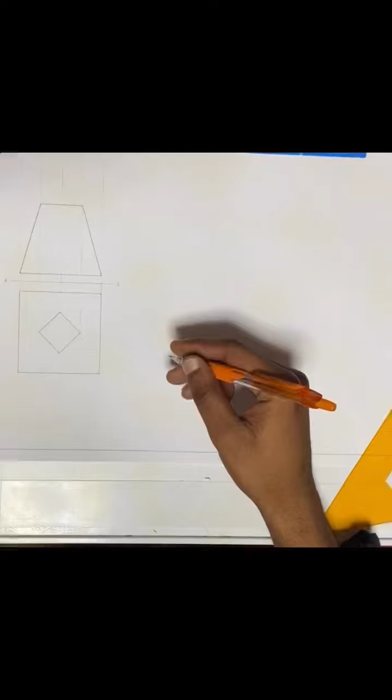Okay, guys. So now we are going to do a transition piece, a square to square transition piece. Here we have our front view and we have our top view. As you can see for yourself, both of these views are incomplete. And this is a first angle orthographic projection. So what you ought to do first is complete both of them. Let me start with the top view.

Then the last one we have here is our seam. Next, we must complete this one. As you can see for yourself here, it forms a triangle. So here there has to be a triangle as well. So now we're all done with the lines, the seams and everything. Now what we must do is number the lines, the seams as well.

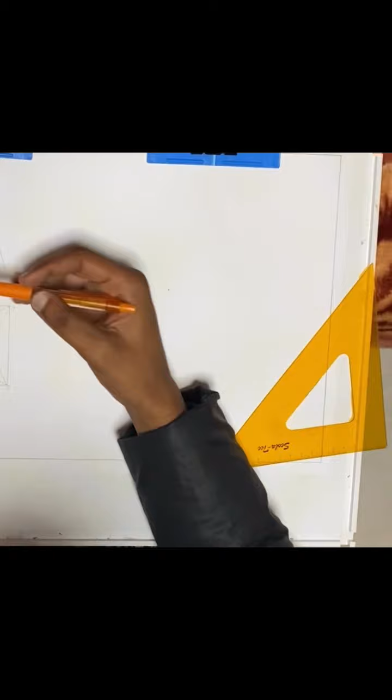So, as all of them are the same length in a way, we can just call them B, respectively. But again, we are going to get their true length because they are not parallel to the XY line. To determine the true length of B, we just need one of the base sides. As we have one of the base sides here, we are going to use the cone method. We're going to measure here. Then we're just going to scribe an arc.

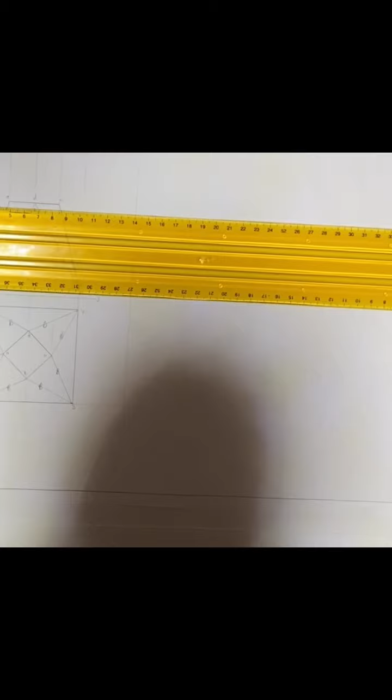After scribing an arc, we join this arc with the base here. After joining that, we project it going up. After projecting it going up, we then join it here. So now here, A, B, C, D, you see, all of these edges are parallel to this because it's right on the top in a way, if I may put it that way. So these we can just name C, C, C, C.

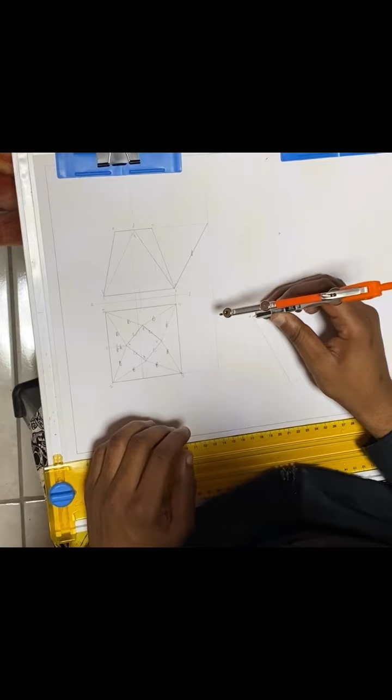Yes. So now that we have determined our true length and double checked whether they are okay or wrong, we can start with our development of the transition piece. We're going to start from A, you see. We can draw a line at any angle, then we know that A is parallel to the XY line. So we're just going to have this because it's the true length. Then we're going to name this 1. After naming this 1, we also know that this is the true length.

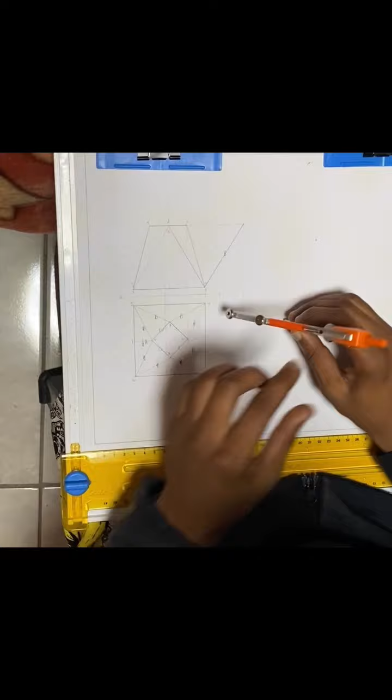So to determine, how should I put it? To determine 2B, no, 2A rather, we are going to use this edge here. This is the true length of B. Then here we have 2. Then we join the lines. Remember, here it's a folding line. Then here it's an outline.

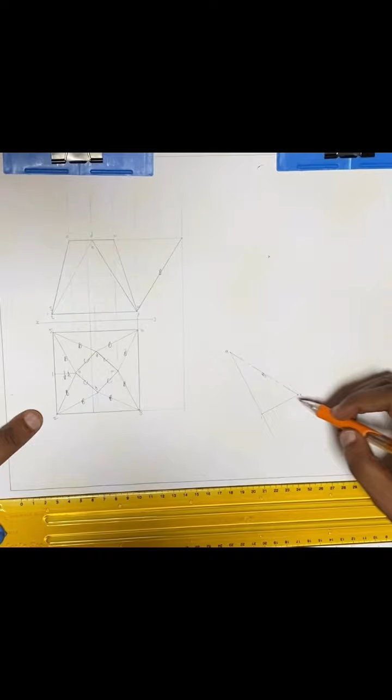So as we have this now, we are also going to determine, okay, we have B here. As we have B here, it's 2A, then right in the middle it's B. So now AB here is the true length on the top view as well as on the front view. So we can measure this here.

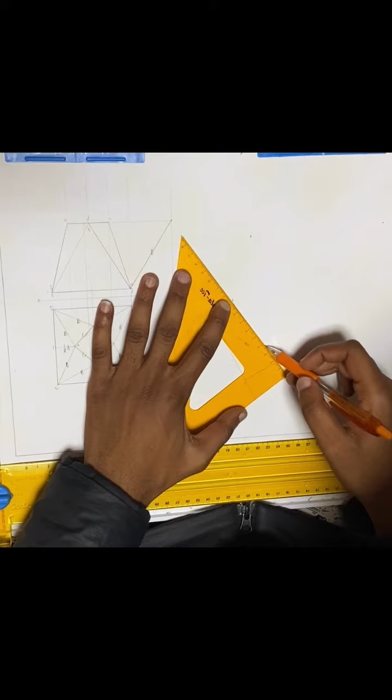Then scribe an arc here. So then use the true length of B. We could have used this one as well. There. Then here now we have point B, small letter B. Then we join using folding lines. Then here we use outlines.

Remember, you have to start from the base, and the base is from here using 1. Now we're using 3, you see. So then there's 2 there. Because it's our true length, we're just going to scribe an arc. Then here we're going to use the true length of B. Then we scribe an arc. Then now we have 3.

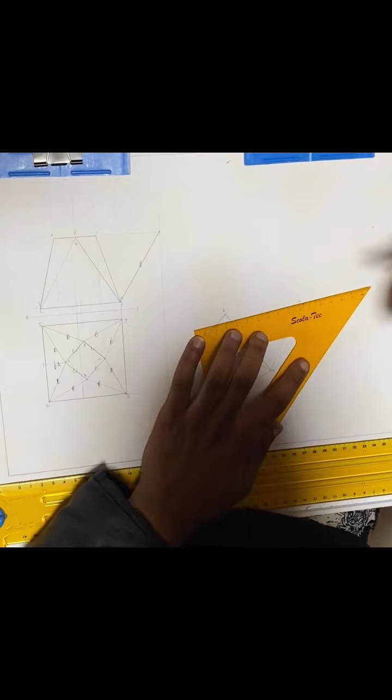So then as you can see for yourself, as much as we have what we just determined now, the others would be so effortless to construct. Here we have a folding line. Then here we start from B. Then scribe an arc. After scribing an arc, we get our true length.

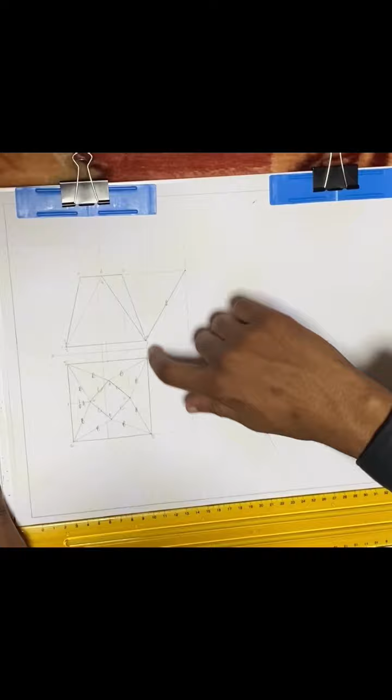Scribe the arc there. Then now we have point C. We join the lines, outline. It should be nice and dark. Then we have our folding line. There. We continue with the process; here we have our true length. Scribe an arc. Then we use our true length here that we have for B.

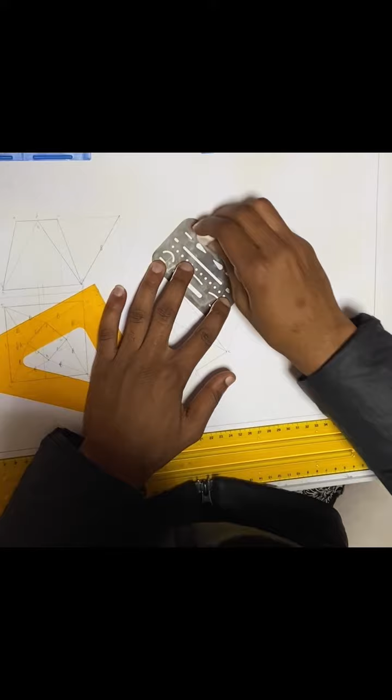Then here we have 4. Outlines. Folding lines. There, folding line. So then we move from C to D, being it as a true length. Scribe an arc. Then we use our true length for B. Scribe an arc. Then we have D now.

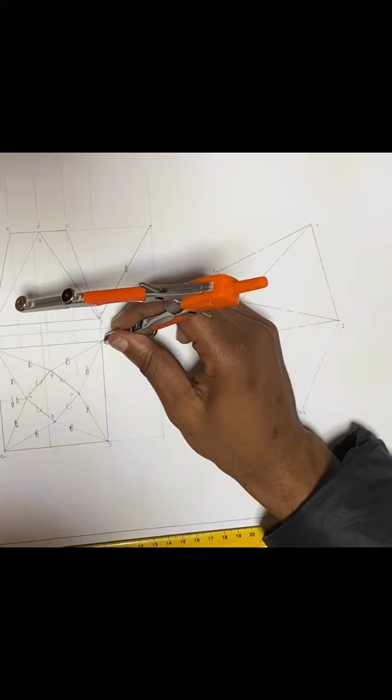Outline. Folding line. We continue with the same procedure from 5 to 4, being it as our true length, B being our true length, then now we have 5. Outline, folding line.

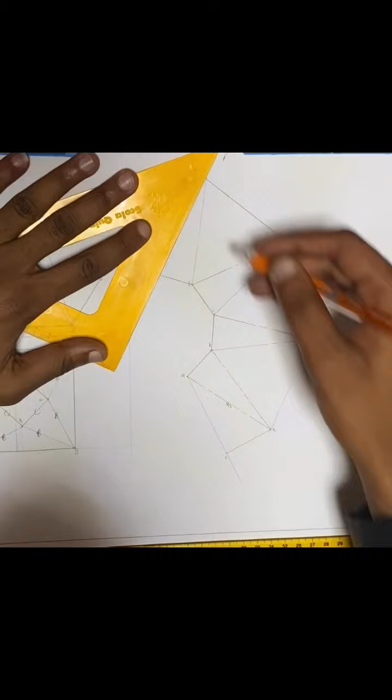Then from D to A, back again. Being it as our true length, scribe an arc. Our true length. We have A now. Outline, folding line. And remember now, we started off from A1, and here we have A5. So then these must meet at A1, which means you must also have another construction.

Okay, having our true length from 5 to 1, then having our true length from A to 5, then we scribe an arc here. Then we are almost done. Then we join the lines here. Here we can just use an outline, and here an outline, because they all meet here.

As far as you can all see for yourself, we are done. You must just notice that you must have outlines that are dark. Folding lines, you must always specify, showing that this is a folding line, this is an outline, using the types of lines. So I think we're okay now.

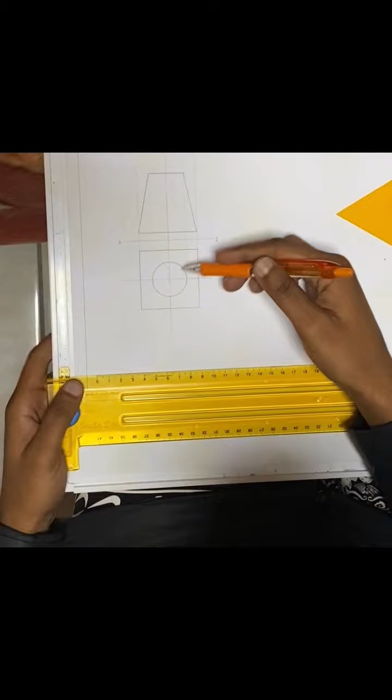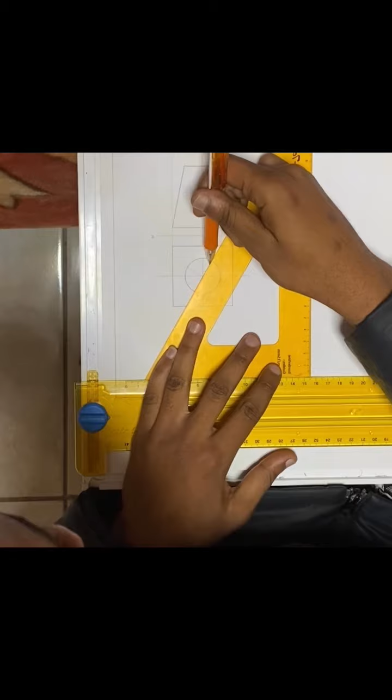Okay, now we're going to work with square to round. As we're working from square to round, we are working with the circle. The circle, first things first, you must always divide it into 12 equal parts. For that, we're going to use the 60 by 30 set square. So as we have this now, we can just do our seams. You see, the seams all join to the base, from the circle to the base, respectively on the 12 divided lines of the circle.

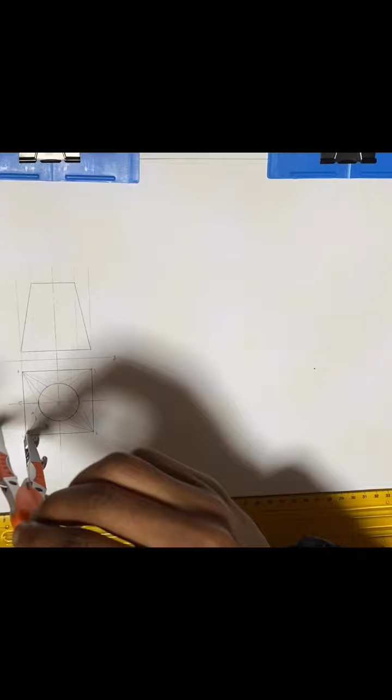What we can do, we can just start with D. D, which passes through A respectively, and C, which passes through B respectively. Then we can just join those arcs. Then after that, we're going to project it going up.

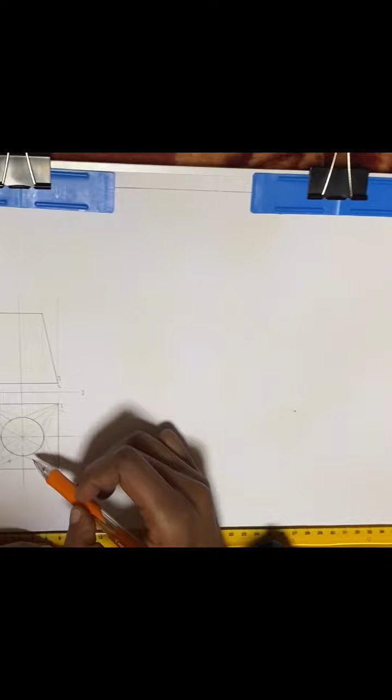Then we project this one again, because we're working with the other part. Okay, let me just finish up numbering. Here we have 5, then 4 at the back, 1 at the front, then we have 2 here, 3 at the back. Then here we have A, B, C, D, E, F, G, H, I, J, K. That I won't mention, but we'll stick to what we have already, because this is circular, it's a round.

Okay, then now what we're just going to do here, we're just going to join this one and this one for us determining the true length. Okay, for the first one, you can see that first C passes through B, then it goes up, which means here we have B. I can just use B / C, you see. Then here we have D and A. So then this one is the true length of

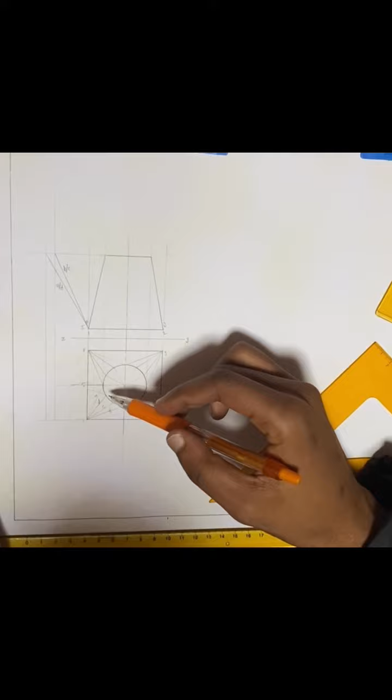A / D. So then as much as you guys can see, I'm only having two true lengths. Led by that, this is a circular transition, meaning that, as you can see, the arc here passes through from D to A, then from B to C. That is why I have only 2 arcs for determining the true length.

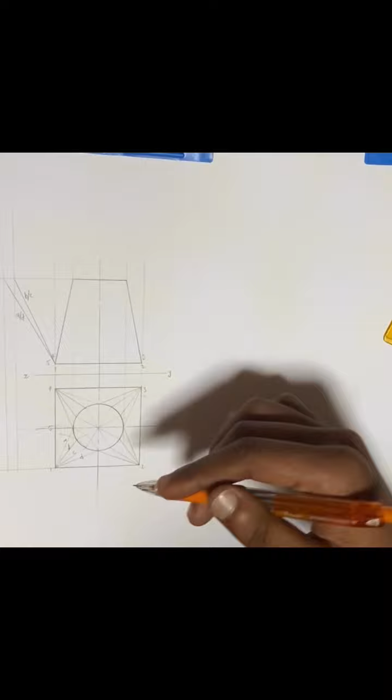Okay, so then now from 5, I'm having 5 here. 5 is the seam, you see. Let me just label it as an alphabet. Maybe I can use E. So then the seam of 5, E, is parallel to the XY line, meaning that this is E, and it is the true length as well. So then as we work from here, we can use the Thales theorem for determining the circumference of the circle. When determining the circumference of the circle, I can just use just a random line.

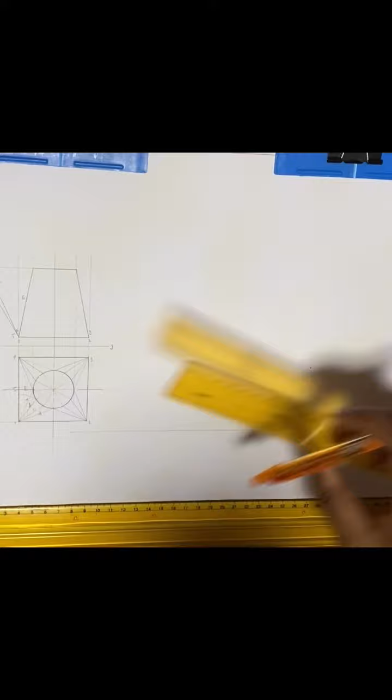Okay, so then from the instructions, they gave us only the radius of the circle. The radius of the circle was 15. So then to work out the circumference, the formula is pi multiplied by diameter. Pi is 3,14 multiplied by the diameter. As we're having a radius, the radius is going to be times 2. Then the diameter is 30, which gives us all in all 94 millimeters.

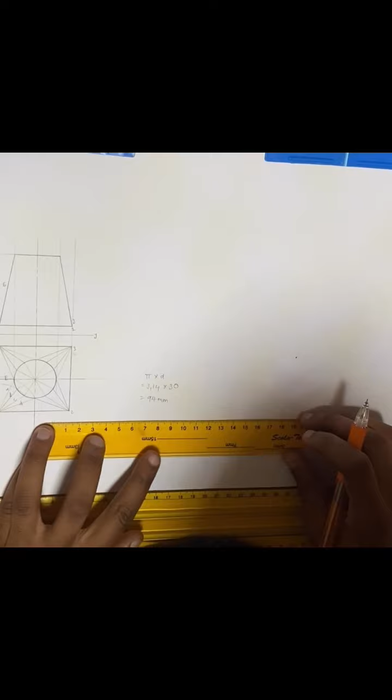So then there I drew a straight line. I'm going to just measure it using my straight edge here. There is 94 right there. So then I'm just going to draw another line for us to divide the line into 12 equal parts. There we have it. Let me make it a bit longer. Then here, this is going to be 1. Then we're just going to divide the line into 12 equal parts. You can just set your compass to any length, then just scribe arcs using the same length. This is called the Thales theorem.

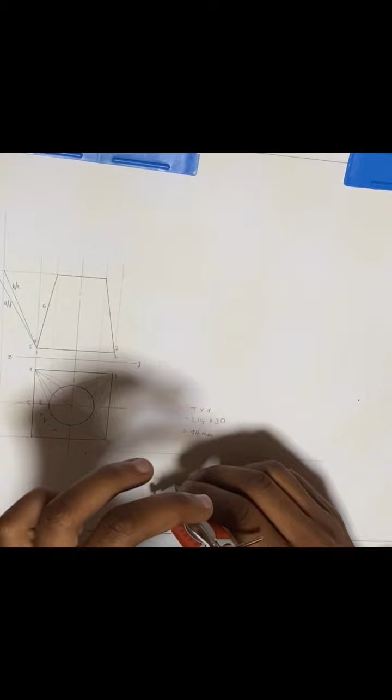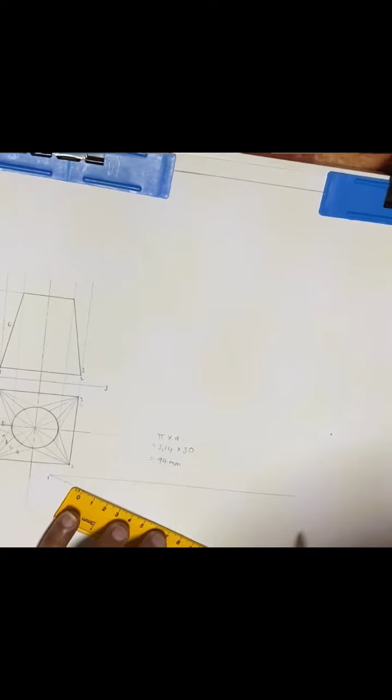Here you must work with precision for you to get the exact length. Let's see. Just want to fix this. I've made a mistake. There. One, 2, 3, 4, 5, 6, 7, 8, 9, 10, 11. Oh my goodness. There we have it.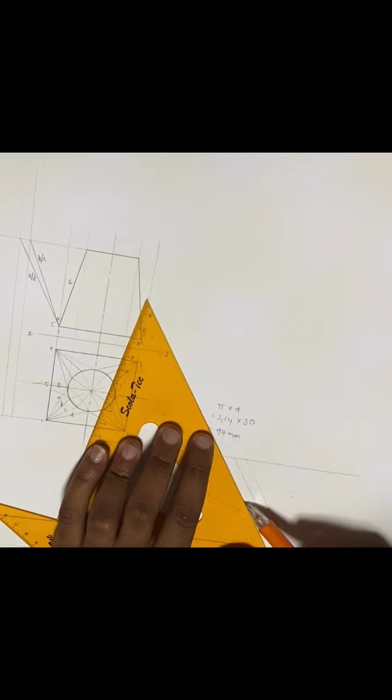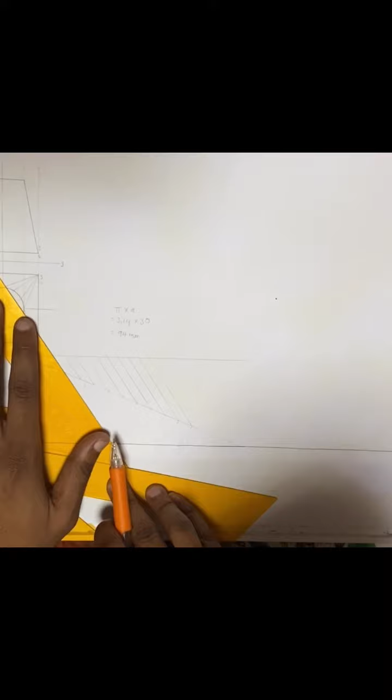Then we're just going to join the lines. You hold the bottom base steady, then you slide this. I'm doing this because I want to know the distance between the fold lines. There we have it.

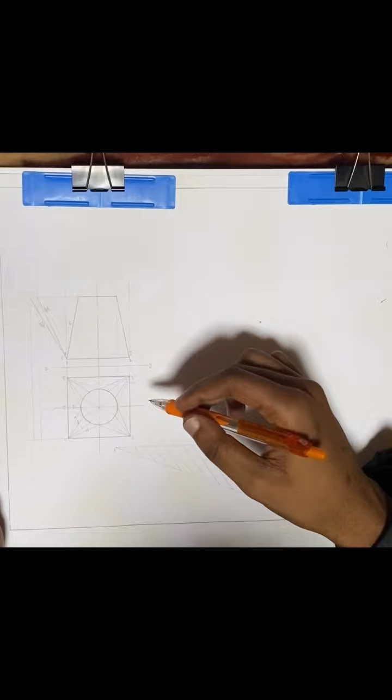The construction here, as we've divided by 12, is just a division showing the actual true length between the segments here, A, B, C, D, going right round. So then now we can start with our development. We're going to start from the seam, which is 5E. I can just start at any point. Okay, this is going to be 5E, going down like that. As I have this now, 5E, I know that the true length of 5E is right on the front view.

I can just take the distance using my compass. Put my needle point there. Scribe an arc. So then as we have here now, this is point 5, this is E. Yeah, this is 5, this is E. So then as we have that part now, we are working from E going to the adjacent side being A. So then the true length for A, we have it right there.

Then we all know that this is the actual true length from 5 to 1. It's a true length on both sides. My arc was very much short. Let me just fix that. There. So then this is going to be 1. We join the lines. Outline. Fold line.

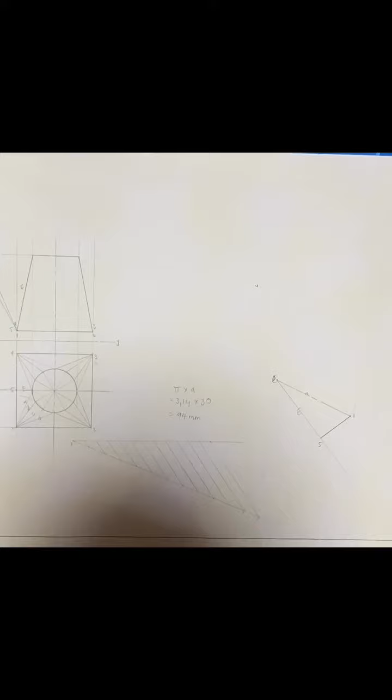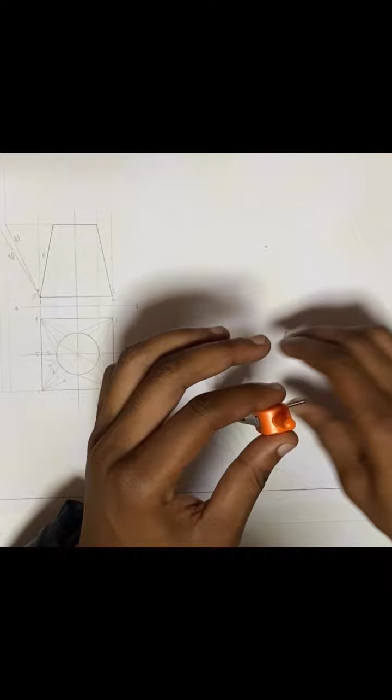So then as we come back here to this part again, here we are working from A. This is A. This is E, capital letter E. This is the seam. This is A. So then now we must work from A to B. Okay, from A to B, you must first work out the true length. Then here we have the actual true length from E to A. Just going to scribe an arc there.

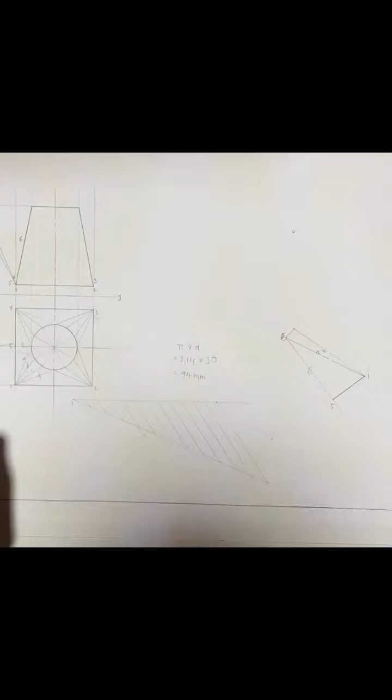Fold line. Then here you can just draw it in construction because you will see later on. Okay, we're working from A. This is B. So then now we're working from B to C. Excuse me. Here's the true length.

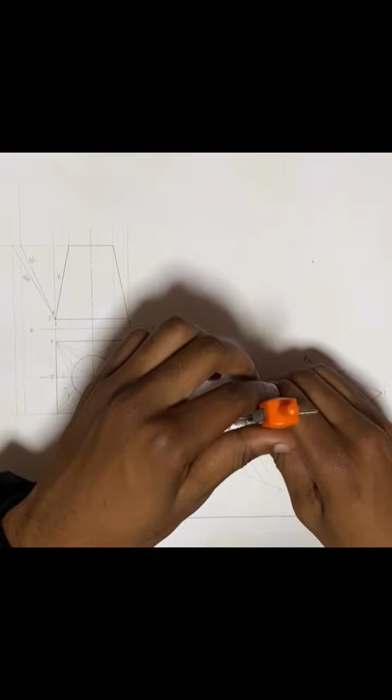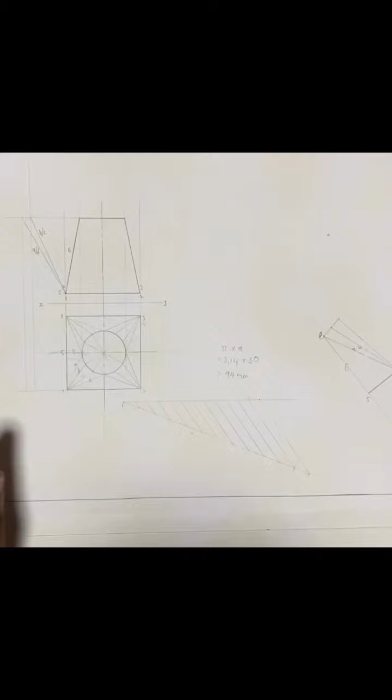We work from the base. We come here. Draw another arc. Then we join. Construction. Folding line. We go on with the same procedure.

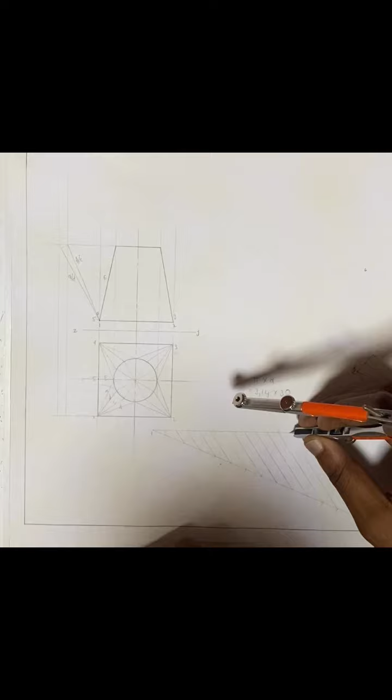This was A, B. Now this was C. Now we work out D. D. Having our true length there. We work from the base. We work from the true length that we have here, which was our circumference of the circle. We come here, swing an arc.

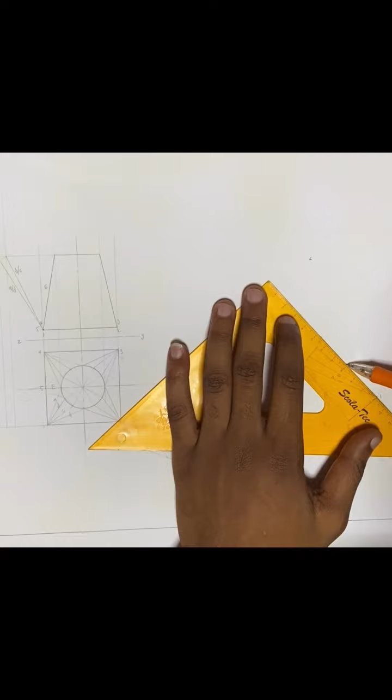Construction. Folding line. So then now we have worked out the first folding lines that we have from the circle itself. Now we ought to work out from 1 to 2. Okay, from 1 to 2, it's our true length. Just going to swing an arc.

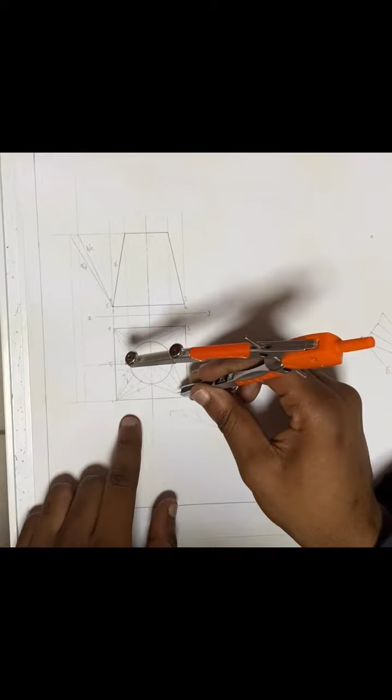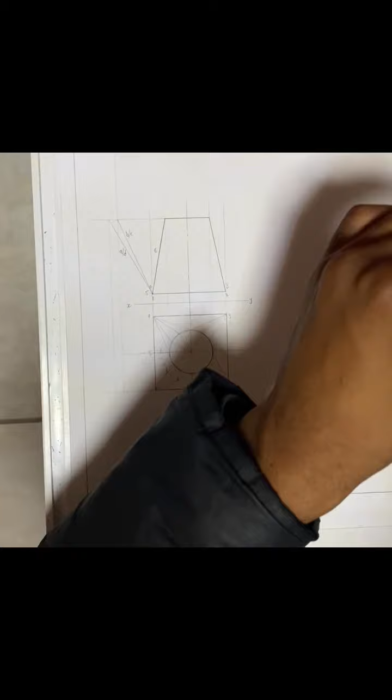Okay, from 1 to 2, we start all over again. We start with what? A. Because you can see for yourself that it is seemingly one and the same thing. So then we're going to use the true length of A. You join the lines. This is 2. Outline. Folding line. We repeat the same procedure.

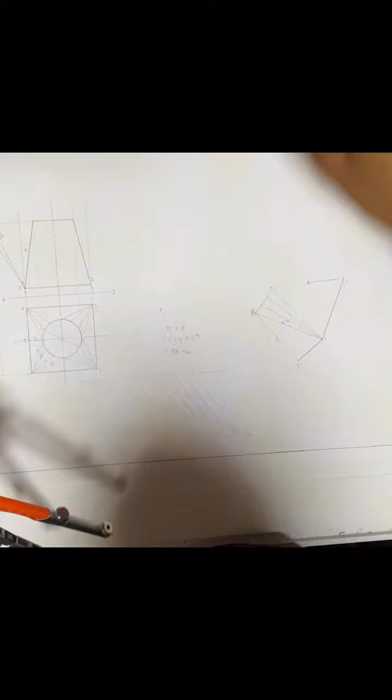Now working from A to B. Let's first label this A to B. We determine the true length of B. We work from here, square an arc. Then here we also have our true length here. Grab another arc. Construction. Folding line.

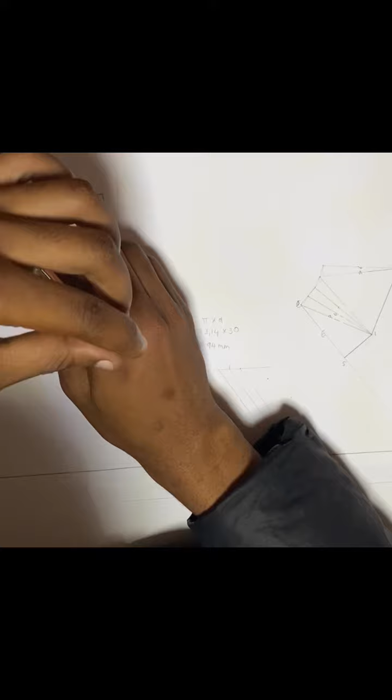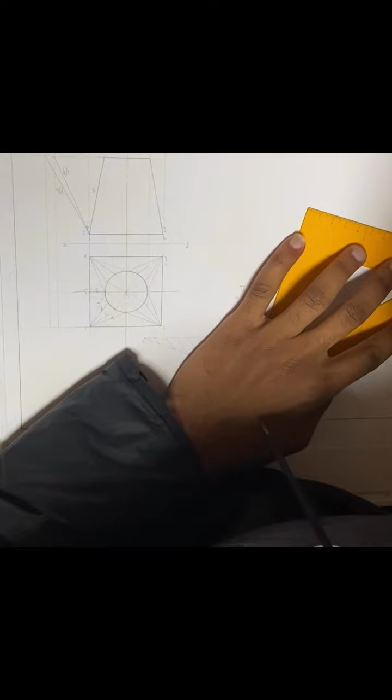We have B now. Then we work again from B to C. Square an arc. Square an arc. Come back here again. Square an arc. Construction line first, then a folding line. Then now we have C now.

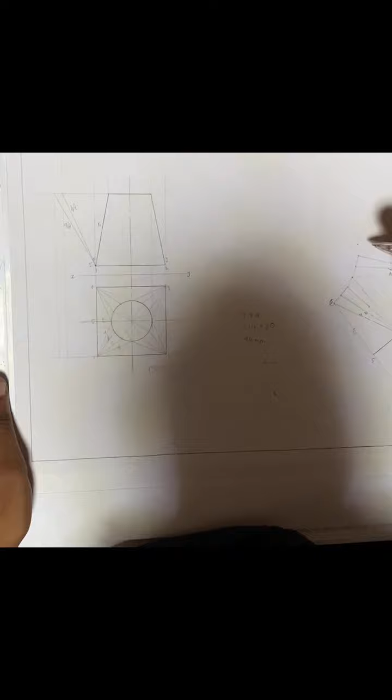Then we come back again. We use the true length of D. Square an arc. Then we use the true length from the Thales theorem. Just grab an arc. Then you join the lines. First things first, construction. Folding line. There we have it, D there.

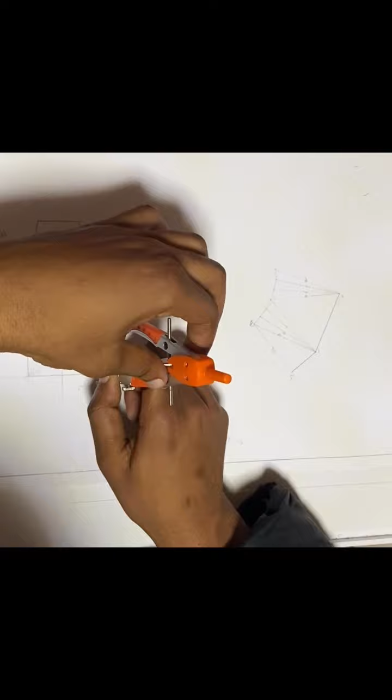Then work again from 2 to 3. From 2 to 3. We're almost done. Just grab an arc. Then from 2 to 3, we start all over again using our true length for A. Just grab an arc. Having here an outline. It's supposed to be dark. A fold line.

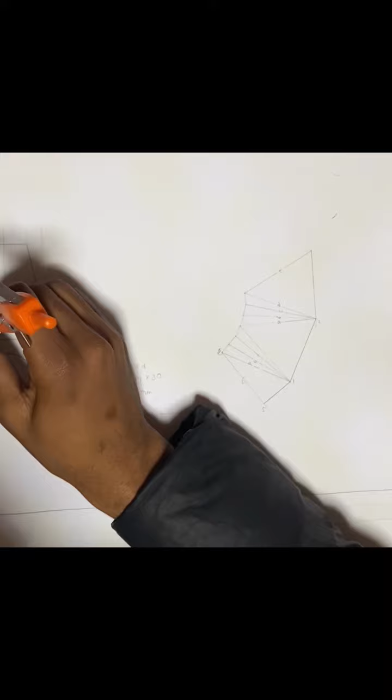A again. Then work from A to B. Use the true length that we already have. Just grab an arc. Use the true length that we have from the Thales theorem. You can use any of these. Use the construction. Then here a folding line.

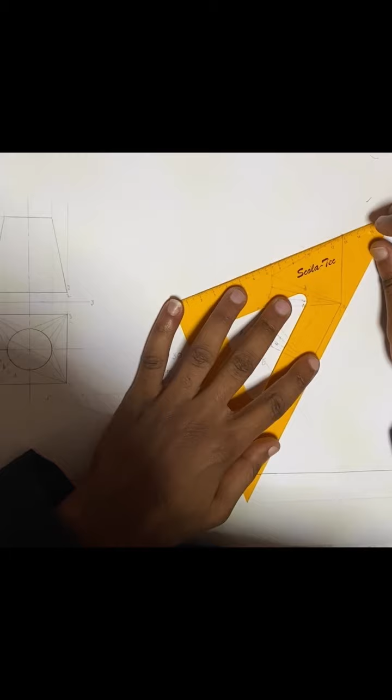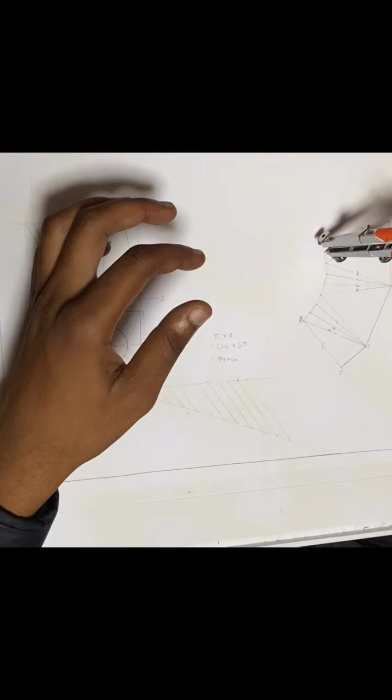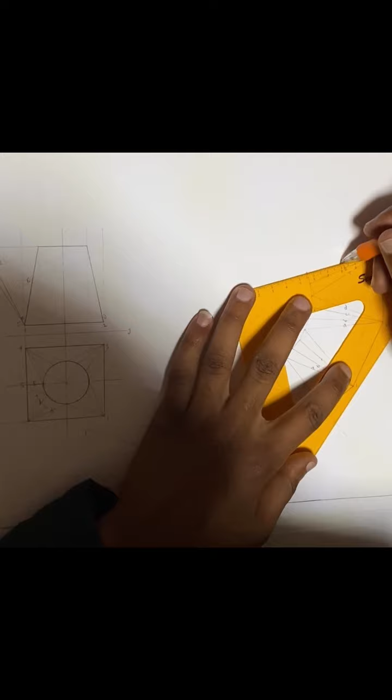Then we work out again another true length that we have for C. We use the true length that we have from the Thales theorem. Construction line. Then here a folding line. There we have it, C. From C, then we have D.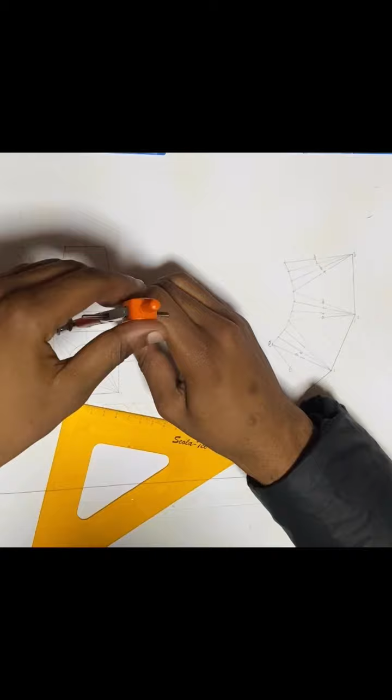Let's grab another arc. Construction. Fold line. Then we have, here we're having 3. So then now we're working from 3 to 4. 3 to 4 is the true length. Then first things first, we're starting off with A, having our true length.

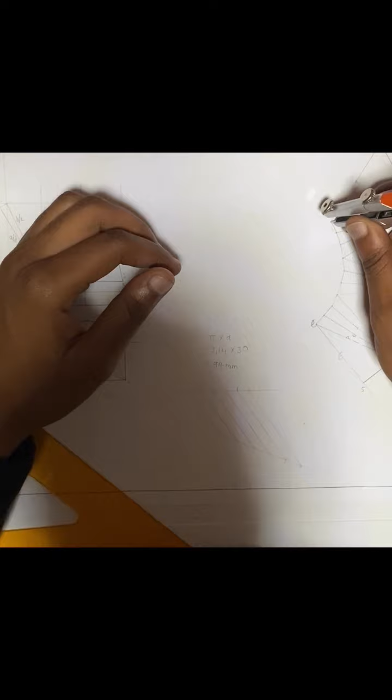Outline. Excuse me. Folding line. This being A. So then as we're having this as A now, you go to B. Scribing arc. Folding line. Then we have B now.

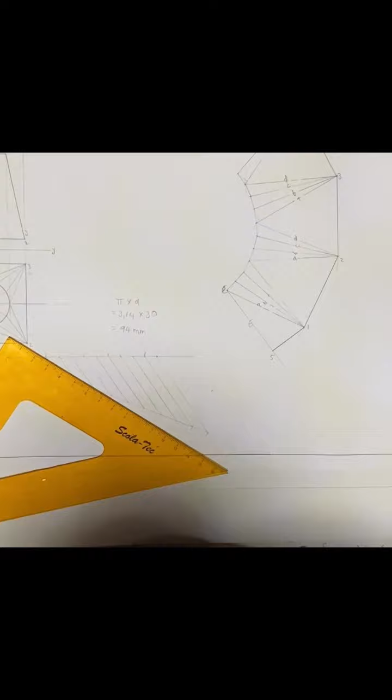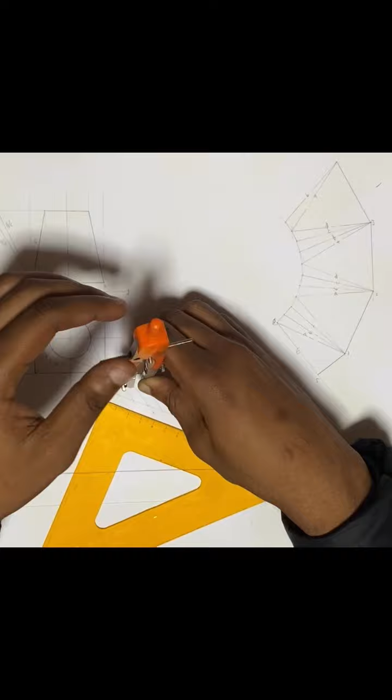From B, it's C. Determine the true length. Scribing arc. We work from this. Having it the true length. Scribing arc. Construction. Folding line, C.

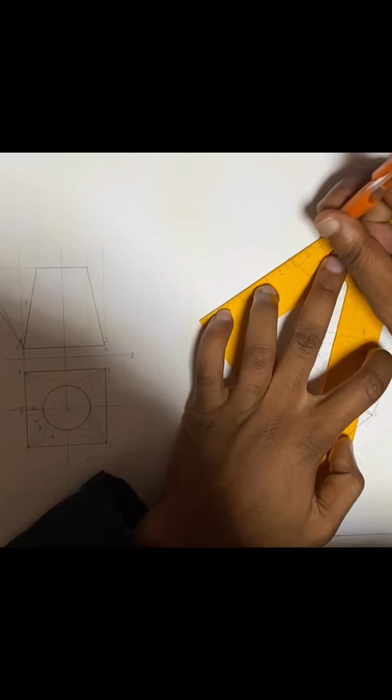Starting from C, we have another true length. Scribing arc. Work from this to get the true length. Scribing arc. There's D. Then here it's 4. So then remember now we're working from E to 5. And E to 5 is the seam. So then now we must also have another construction from 4 to 5.

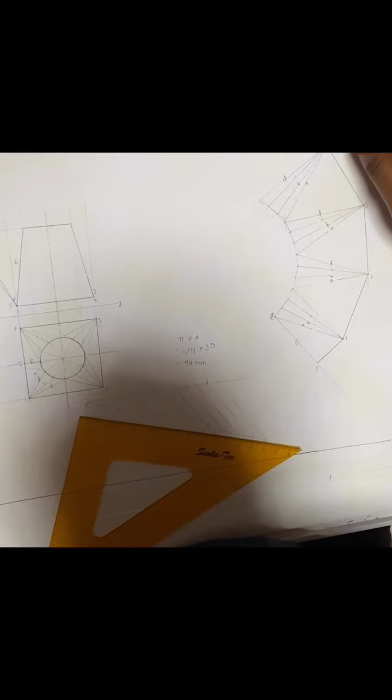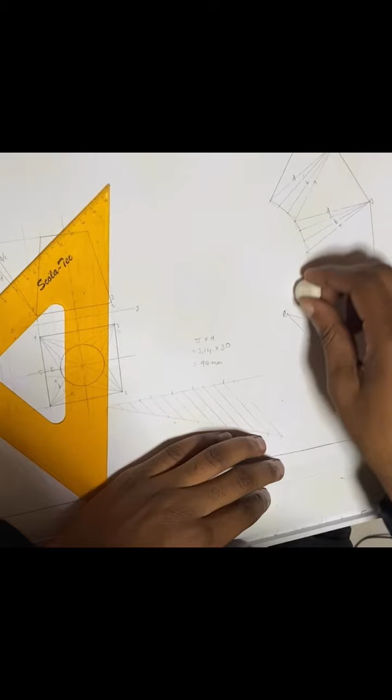So then what we have here, we have the true length from 4 to 5. There we have it right there. We already have the true length for the seam. Then we label this point 5. Join the lines. Outline. This is an outline even, because it's connecting to the seam. So then now, here we are only just having construction line. We just need to erase this off.

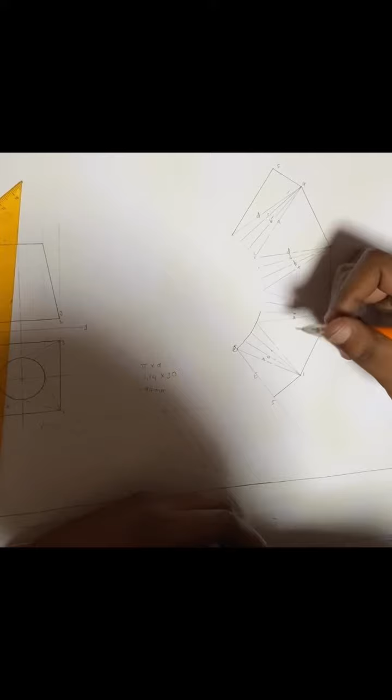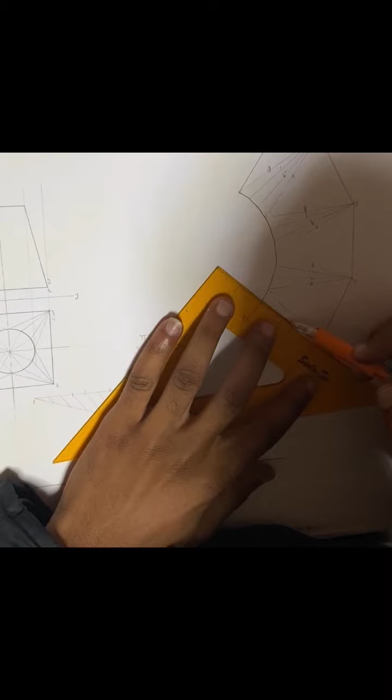Then connect these lines, because this thing, it's a round shape. So then what you can do is just connect by 3 dots with your neat freehand drawing. 3 dots. 3 dots. There we have it right there. Make sure the line touches the edge there on top. So then there we have it now, the development of the transition piece.